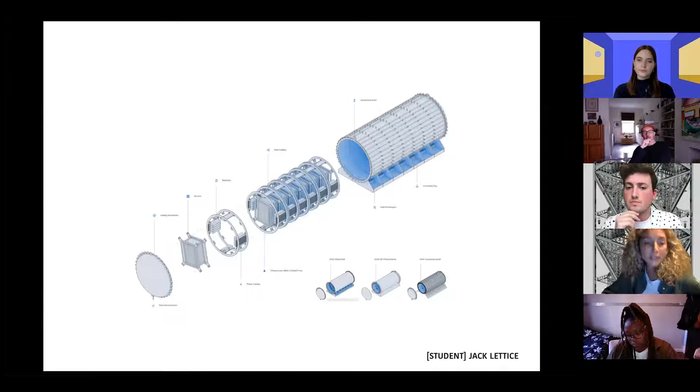There we were looking at a far larger context of hyper-consumerism. And hyper-consumerism, especially now thinking of COVID-19 and the global context we're in, relates very much to global hyper-digitalization. So: hyper-consumerism, hyper-digitalization, we need stuff.

It might be that the postmodern age, it might be all post-human cyborgs and so on if we look at the theory part. But at the end of the day, especially what this crisis is showing us, we are bound to material and physical infrastructures, and we need those physical products, even if they come through a digital phase, to arrive somehow physically within our immediate reach.

Another thing we're looking at with super infrastructures, very apparent in today's context again with COVID-19, is transport and mobility. We take it very much for granted, but it's a whole ecology and network of tiny things and chains that just need to work together - how do I move stuff from A to B, be it humans, goods, or services? Me and Fraser borrowed a bit the term 'radical technologies' from Adam Greenfield.

If you didn't read his book yet, It's super, super awesome because it talks about things that we might perceive as radical technologies and others not, such as, for instance, the mobile phone, and how it changes the everyday, and how it changes your everyday protocols, architectural protocols, and also urban protocols.

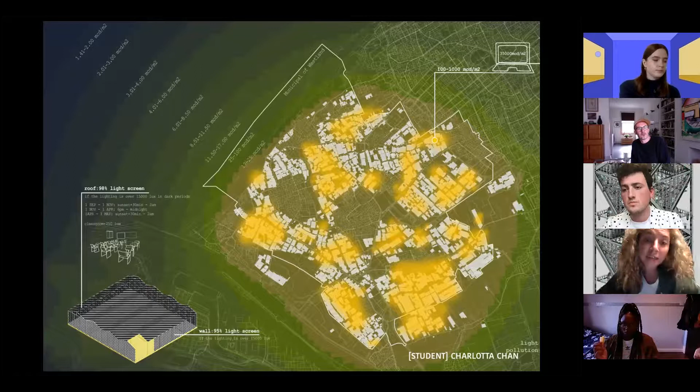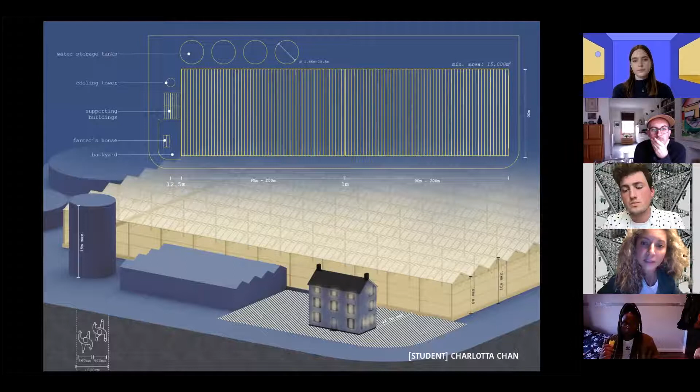And when they are growing, for instance, towards cities or encapsulating cities, how do we react to it as architects, as urban planners, as landscape architects, and what are the strategies then that can be developed and put in place? Just to give you a perspective of what it looks like in between those greenhouses, this is literally the typical family house right in the middle of these greenhouses.

And from greenhouses and food production on, looking a bit more back to the theme of the data center, looking a bit more into detail into data centers, terrestrial landscapes, and also the idea of centralized and decentralized, because what is the relationship between the data center and food production, right?

So again, in today's context, when you are placing an order for food, online shopping, whatever, we rarely think of how that signal is traveling and how it is actually connected to a built environment. So there is always the notion, oh well, I'm placing an order, it's the cloud, it's air. It doesn't really exist, right? You don't really think of the material built environment connection that there is.

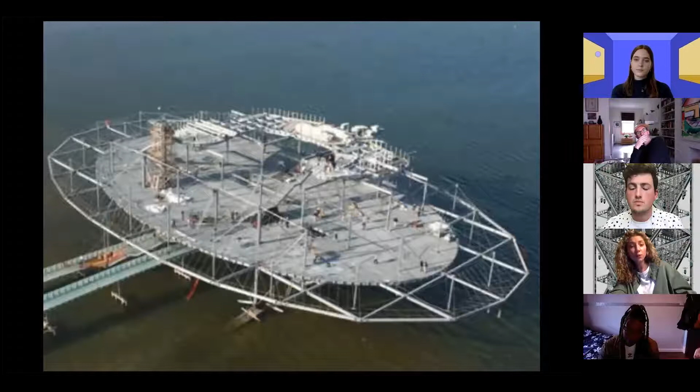So this is the longest fiber cable line in the world, 35,000, or approximately something roughly around 35,000 kilometers. And this is, for instance, here, location of renewable energy plants, where Google takes its energy from in terms of green energy.

So just the whole dimension of the access to the digital and us being able to unfold within this digital realm, it means that there has to be a data center, there has to be an energy plant, there's a whole infrastructure around it that needs to work and perform.

And if we look, for instance, at London, so London has 175 data centers, Amsterdam 108. For instance, for Amsterdam, if you would count just the very big hospitals, it's just 13 hospitals. And also in terms of theaters, obviously depending on their size, but if we just look at footprint-wise, the biggest one, roughly around 20, depending on how you're counting.

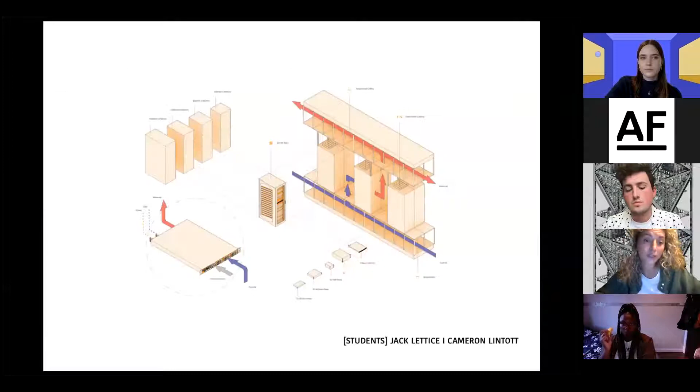So for instance, here I'm not going to go into detail into the different components and parts that students had to look at. And it's also quite interesting in our research to put this type of things in relation to what is happening in art, in architecture.

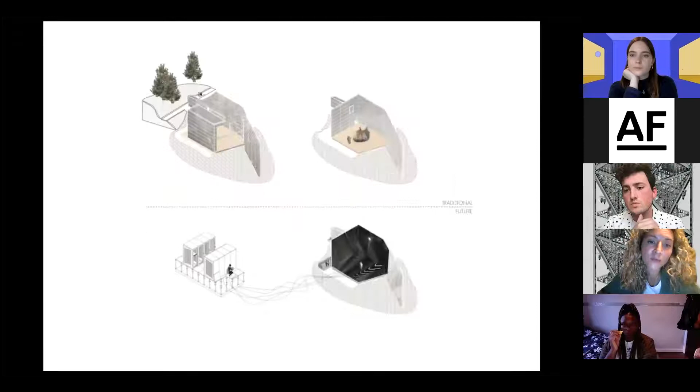There tends to be this techno-fetishistic way of analyzing and looking at things, like, oh, that's the data center, that's the data farm, that's manufacturing something, completely decoupled, or often in discourse decoupled from things that are happening in architecture and in the arts. Just doing this type of graphics, to see what relations are there and how can they be further explored in work, for instance.

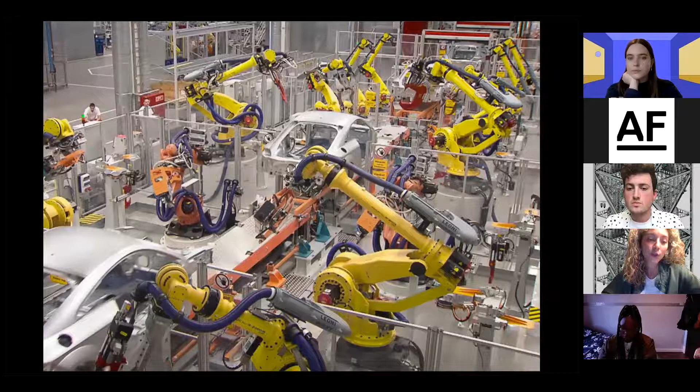The crisis we're facing, a lot of discussion about what is happening in terms of loss of jobs, and the whole discourse around it. Normally there's always a precedent, and here we're looking at the history of the factory, from Ford, the Ford production line, and the building typology of the factory built to accommodate people working with machines, so rather processes anchored around the human, to today now the factories built around the industrial robot arm, the KUKA, BMW and Audi, where we have this false understanding of, okay, it's all hyper digital, hyper automated, and so on.

But then came COVID-19, and we're talking about face masks, and one is looking at, okay, what in terms of textile manufacturing, what are the conditions for it, and how does the factory look there? You learn that textile manufacturing, most of it is done only by humans, because it is far more productive from very many different points of view.

Whereas you can see that the BMW or Audi factory are super smoothly and neatly designed to accommodate the processes of the machine working, you can't really say the same thing about today's, for instance, textile manufacturing factories, and they're being ignored in both discourse and architectural work.

So we're just trying to look at these different dimensions, okay, super infrastructures for machines, super infrastructures for humans, and also at this stage raising a lot more questions than necessarily answers, just trying to have a discussion and debate around it, to then looking from, for instance, textile manufacturing, mass manufacturing, to how automated warehouses are.

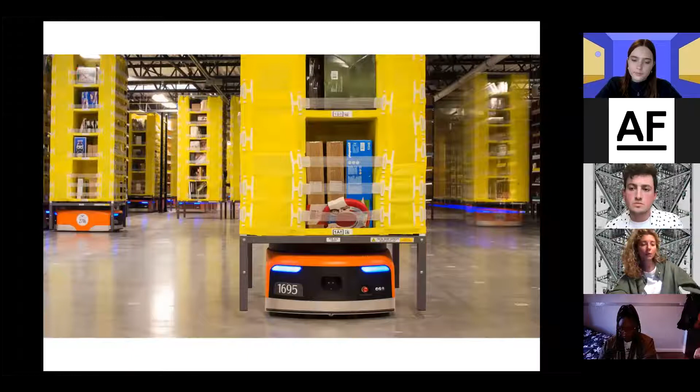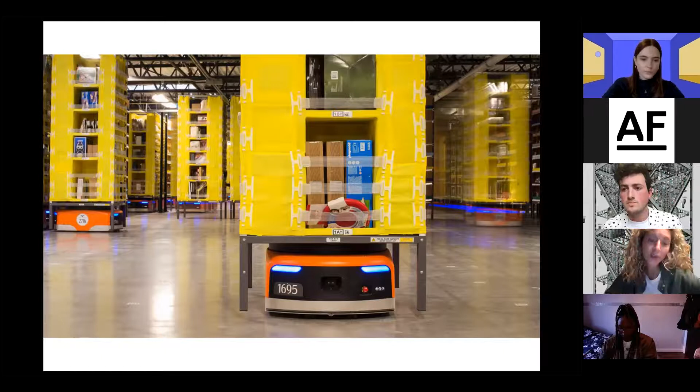Warehouses, and for instance, here we have Amazon, the Kiva system, the teeny tiny robots now that move everything around, where the question is, again there's this techno-fetishistic symptom of, no, there's super nice photography, the spaces inside are seductive, it's this industrial digital look. A lot of discussion about, oh, okay, we're building for machines and so on. But then parts like the textile factory, textile manufacturing, they're not being included into the discourse.

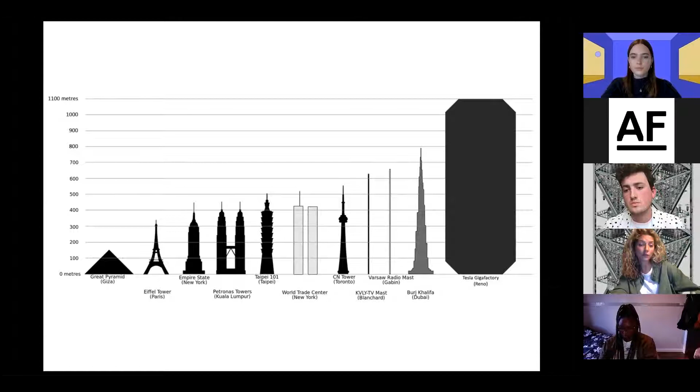And for instance, also if we're looking here at Tesla, and just also sizes and scale of things, so this is the Tesla Gigafactory. Probably most of you have seen this graphic, where you can see the footprint of the thing in relation to other well-known structures. So it becomes a whole discussion around not only magnitude, but also really what is the actual physical footprint, and what is its relation to territory.

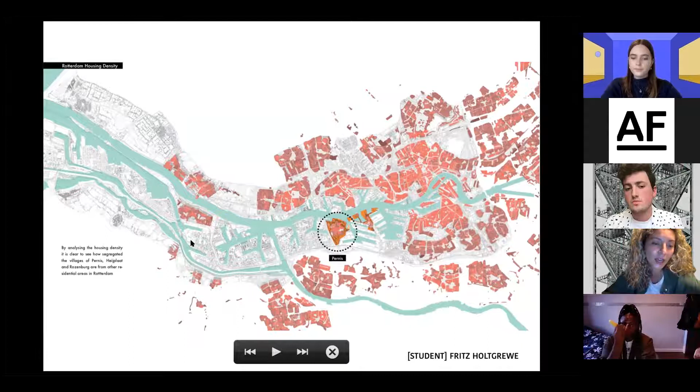Again, we see today how dependent we are on them to function. But what is the urban strategy, and the long-term built environment strategy, beyond just their performance and efficiency, where we as architects, urban planners, landscape architects, designers and makers can tap in and improve the spatial experience, just as simple as that.

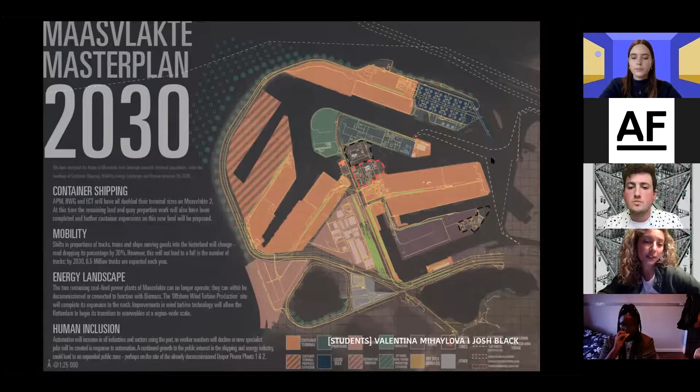If we look into the port, this tip is reclaimed land from the sea, completely artificial. The whole port is built to accommodate processes related to ships, at a completely different scale than the human scale. These are the processes they're built to accommodate, and this is also the type of energy they require to work.

But talking about them just as machine landscapes is very deceiving. For instance, the Port Authority of Rotterdam has many employees, some working in transport, some in industry. It's the same situation as for factory workers.

It might be built for machines and technical processes, but at the end of the day there are a lot of humans incorporating and cohabitating those spaces. Sorry, I'm having a moment here—me and Fraser joked that this would happen, that I'd get a cough, and it's totally happening.

On top of these complexities of heavy industry and super infrastructures, you get other radical technologies such as drones, which are now commonly used by the Port Authority for monitoring processes and so on. So what does it mean if on top of super infrastructures we have these radical technologies, coming in because we need them for performance and efficiency, and what does that mean for those human inclusion zones? Fraser looked at that in his research, specifically developing a scenario and vision for London in terms of drones.

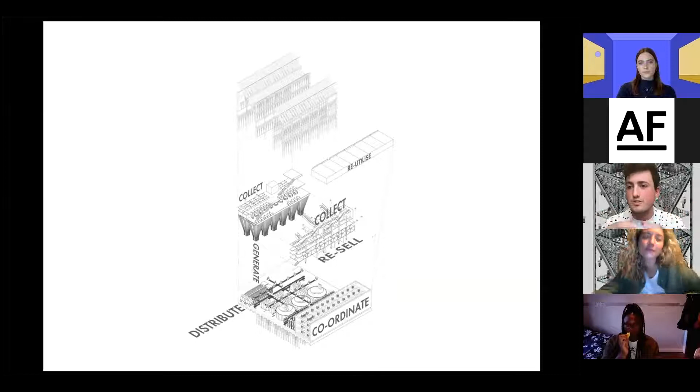So, the beginning of that was starting to think about how industry actually lives at the moment, how infrastructure lives. Everything we've looked at so far is very secluded—you've got Port of Rotterdam, everything pushed out to one specific bit of land that's still woven in between where people live. But you also have this thing where the majority of it is actually being pushed out of the city centre.

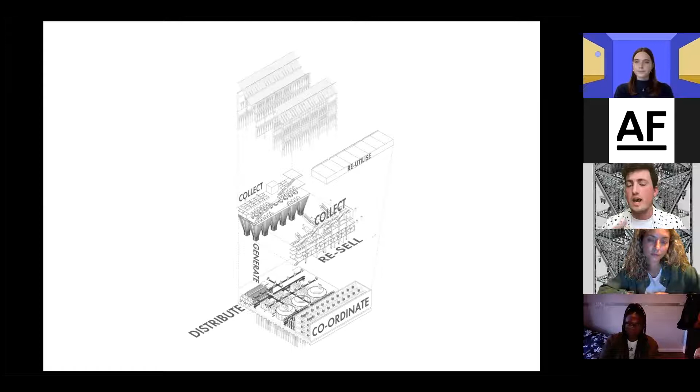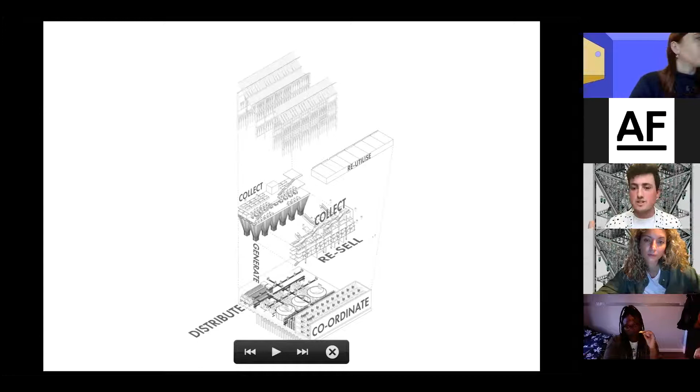So this was a very initial design project looking at how you would bring that back into the centre and how you retain industry, and what that means. The idea is that you create a new civic space around these processes. Instead of hiding away all these processes to do with waste recycling and how you deal with that, you put it on show for everyone to see, to take an actual count of what is going on and why these things exist.

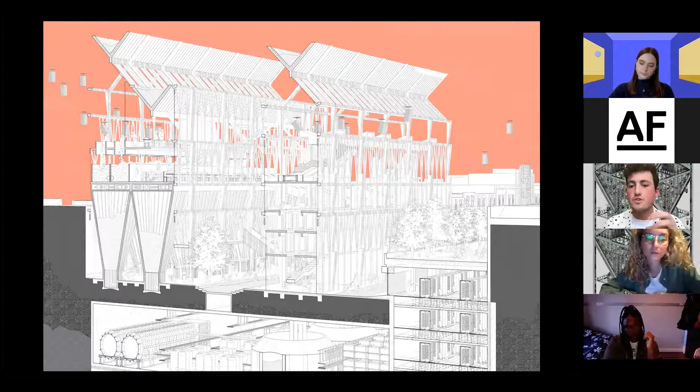This ended up in this rather large scale industrial space on the Old Kent Road in South London. The idea was that as high streets are starting to change, especially with COVID, we're now going almost completely online for how we purchase things. What happens to the shop fronts on the high streets, and how do you start to repurpose those and use infrastructure to key into that and create new meaningful ways of interacting with each other?

So this turned into an initial design looking at how you actually collect the waste, and it comes into these decentralized ports. Instead of having large scale, huge infrastructures spread around the city, or one just outside of town, you have them spread across the city. They deal with things on the ground at a certain scale, instead of having to be shipped off and transferred to different places.

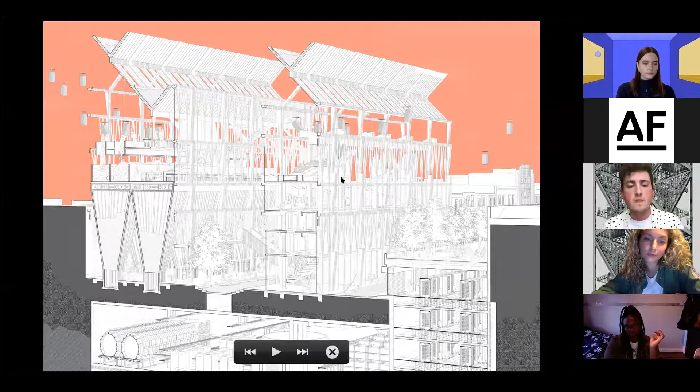These were moments where, as architects, you get to have a little bit of a play, and it's kind of whimsical, but the idea is that you can start educating people around where everything's coming from, creating this back and forth between both sides of the coin, between the automated and the human-centric side of things. You can use these large footprints and different ways of utilizing infrastructures to create additional spaces for people as well as the machines.

Then this was when I began the journey looking into drones and how they, as a radical technology, are actually going to manifest in our society going forward. Because they're very efficient, you can coordinate them—why can't they come and pick up your bin from your door and sort all the waste before it actually enters the facility? You change the way these sort of things move. We've had lorry drivers for as long as we've known, picking up your rubbish from off the street, but what happens when you change that dynamic and start bringing in drones, and how does that change the landscape?

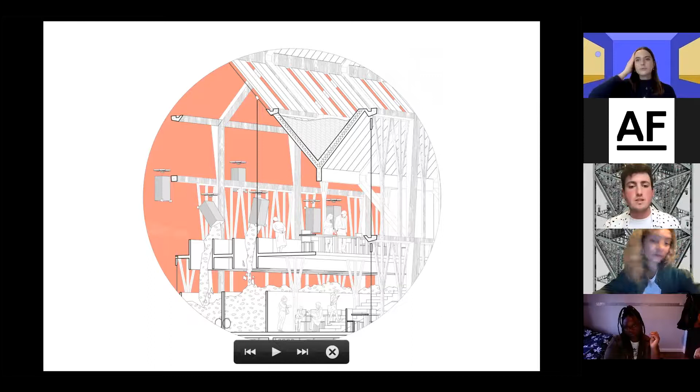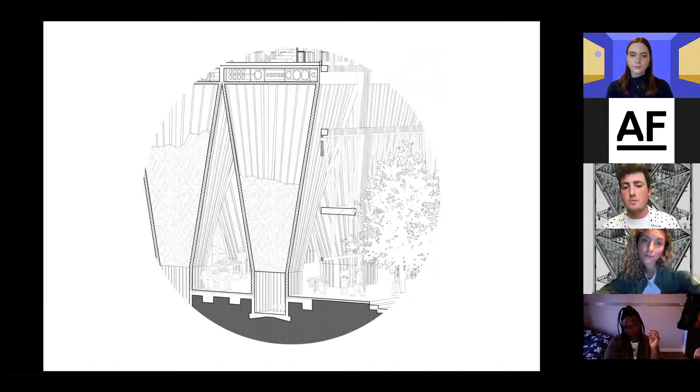Also looking at fermentation and different ways of recycling. If you have fermentation tanks breaking down materials, can they actually form new sorts of public spaces and backdrops to allow human activity? That's just a quick collage thinking about that.

So the question was, how can we utilize these technologies and infrastructures in a different way? Can we create new infrastructures that allow us to consolidate this and bring it back into the city, bringing back the activity, because technology allows us to do that. I'm not saying it's a catch-all thing, but this brought me into the next bit of the thesis, thinking about it as an upscale thing—if you're dealing with, say, London, and the waste we produce daily, what is the architecture that actually facilitates dealing with that?

So the idea was that again you have these separate sorted boxes and things that are picked up by drones and so on, and they then take them to a centralized vertical recycling tower that each borough would have.

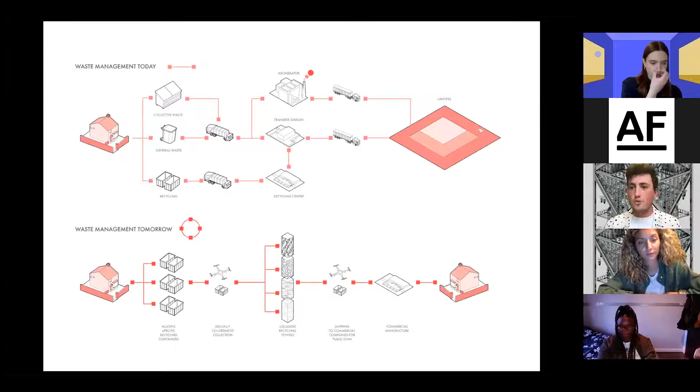The idea is that each one of those would deal with all of the waste respective to each respective borough, and then return the actual goods that were recycled into new things back either to commercial manufacture or back to the houses that they came from.

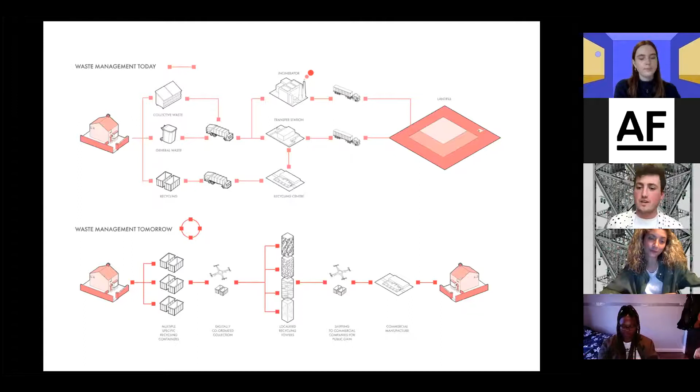It kind of transformed from there, from thinking about the whole scale question and London, and really trying to get into what that architecture actually means. Because the interesting thing about all of this is that we just don't know what it's going to look like in 30 years' time, which is when we'll need a lot of these large scale infrastructures to deal with the waste, the energies, and the things we're buying.

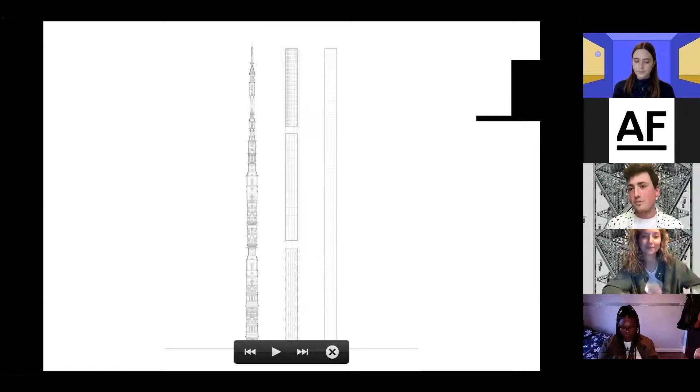So it was kind of a question of how we used to build. Looking back to Hawksmoor and the churches of London, and kind of keying into Soane's Pasticcio, thinking about if you were going to build a church at the scale that we build skyscrapers now, what does that look like and what does that manifest? Could you actually build in stone that high? And that tongue-in-cheek way kind of led us into what we do right now.

Building super tall is a massive commodity. It's all about the most expensive, smallest floor plate, the highest you can possibly get, and it becomes a very luxury thing—the higher you live, the better off you are. It becomes very copy-paste architecture. So the idea was to think about radical technologies and infrastructure as architecture that's more about facilitating these processes instead of giving a very specific language to it.

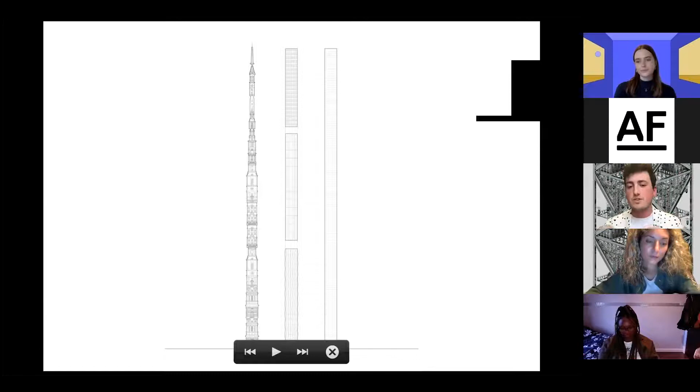Which led into this slightly disturbing view, where I started to think about the height of things and think about the infrastructure at a very different scale.

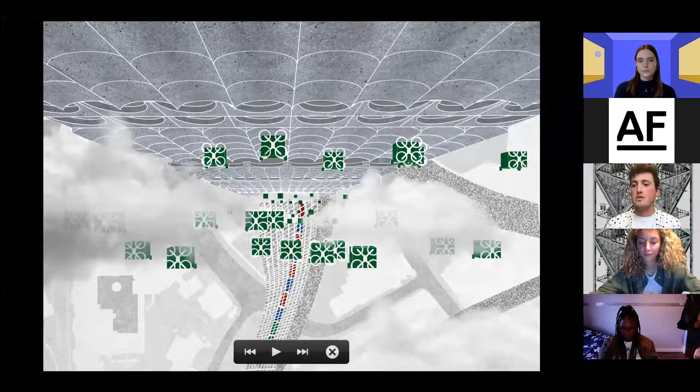Taking that very horizontal scale and flipping it on its end, because in London, while it's not super dense, a lot of mega cities are going to continue to get denser. So there's a question of floor plate, of efficiency, and how you can deal with that. The idea was designing a building on a 20 by 20 meter floor plate—how can you create a recycling facility that can deal with all of the Borough of Southwark's waste?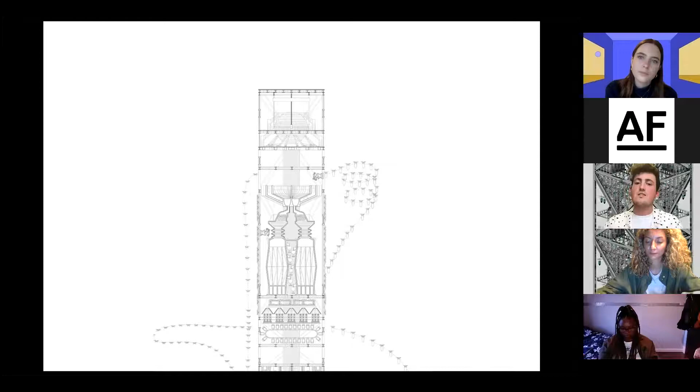It kind of ended up manifesting in a super vertical recycling tower, and the idea is that it was built into modules, so each one would deal with a different material. As boroughs change and vary, they would also be able to change and modify as it went—so if one borough is recycling more of a specific type, like more metal waste, you'd have more of those functions built in.

You can just cycle through these now, so you can kind of see us going down the building—just to give you an idea.

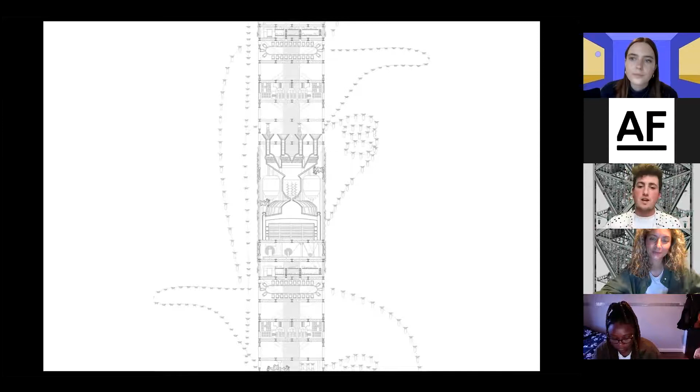The idea is that the drones are picking up your rubbish from out the door, the waste goes in the top, and then it's recycled, and the positive byproducts come out the bottom. Then you bring in all these other technologies like the data center to coordinate all of this and allow it to be redistributed back out again.

It ended up translating into this idea that on the far left you've got all of the functional stuff, and in the middle you've got the actual structure where all the drones live and sleep, almost like bats. Then you have the architecture at the end, which is the big thing that enables all of that.

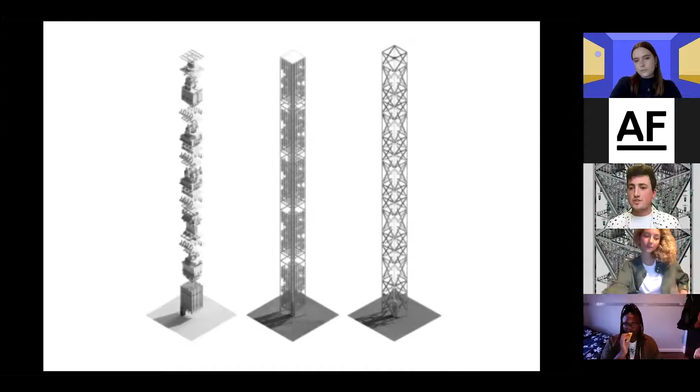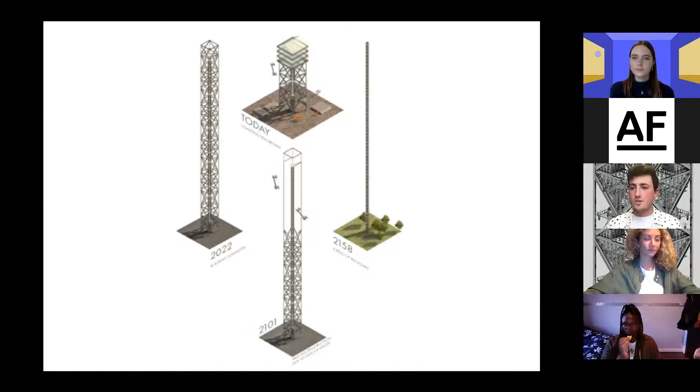The idea being that today we could be producing this thing very quickly, and it's quite a utilitarian way of designing. In a couple of years, you have the full thing built and functioning, and then as time goes on and we get into a more closed loop, full circle way of living, you can start to break that down. The idea is that at the end, you almost only have the relic of what was left. So it becomes architecture that also recycles itself, which is an interesting thing for us—and then just thinking about how that gives something back to the community.

Next, it becomes this system where you start having these manifestations of the new infrastructure that enables these things, but they also become social activators as you go out through the cities. So you could retrofit the Tate to pick up their rubbish and so on. You have this variety of scales that the technologies allow you to operate across, instead of just having a tabula rasa, flattening everything.

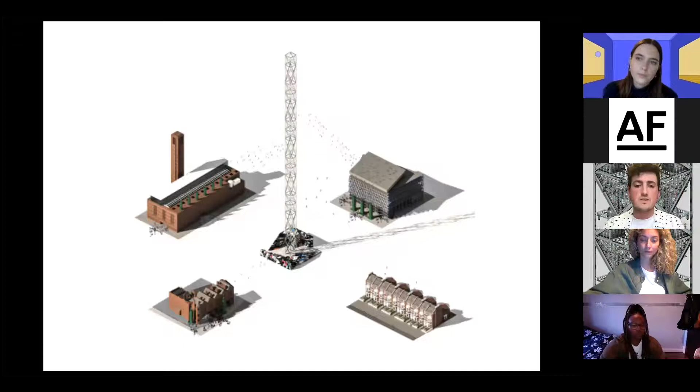Next, and so this was just the last thing, thinking about the next architecture of these recycling structures and infrastructures. It's a question of, you know, we've built to keep everyone happy, and everyone can spend their money and show that off. But the next iteration of that was the idea that these buildings exist purely because of what we're wasting and how we're wasting it. The idea was that these actually become these totemic gestures to what we're producing and why we're producing it, with linkings across the world and that infrastructural notion.

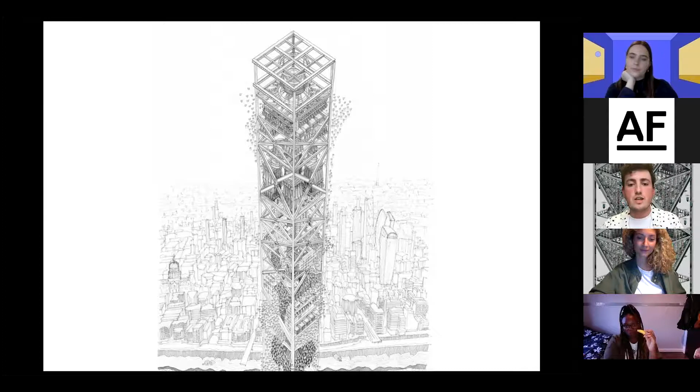And then next, and that is a little bit of us.

The interesting thing about everything we've tried to talk about today is that we're actually getting the opportunity, I mean Future Fuels is still quite new, to start thinking on a large scale and doing quite a lot of research. So you caught us at quite an interesting time where there's a lot happening, but we can't really talk about everything just yet. So if you can post your questions in the chat, that'd be great, we can start talking about things.

We're at the moment working on some exciting stuff in Rotterdam, looking at how we would implement drone systems in the city and what that means for the port as well, and how you move goods and why you move goods like that. So, yeah, thank you.